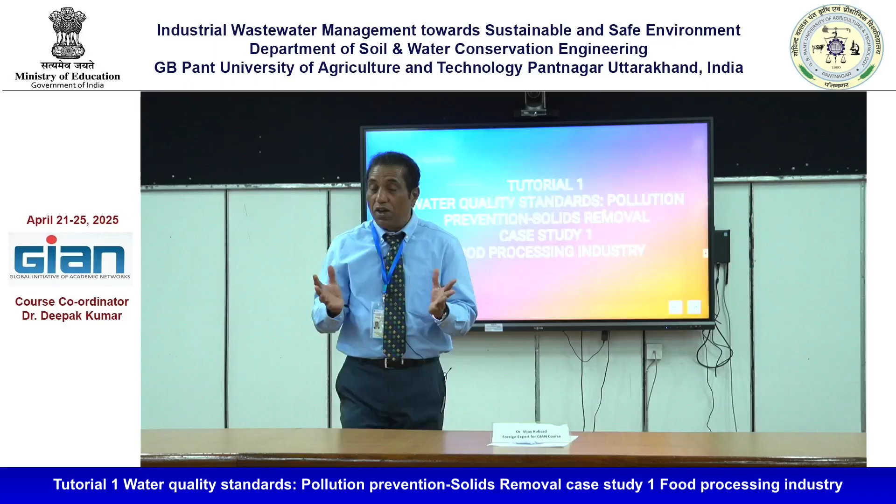You may achieve some part and the next person will carry on. That is how this environment is - if you see how big it is, it's not one person. That is why I was trying to tell you what are the different stakeholders in this industry. You see the industry people, you see the government, you see the activists, you also see the public participation. You have to work with different expertise.

You have to also borrow some of the expertise from other countries. So all have to work together to make it successful, because the place where you are living right now, we have a limited space and source. Also all the resources are limited. You know, the degradation - every day we find a new product, a new contaminant generated, right? So at the same time, we have the capability to generate contaminants, but we should also find the solution of how to take care of that.

There are certain things which we cannot live without. But that is okay - at the same time we should make sure that we keep our environment, water, air, and soil in perfect condition. At least we should start working towards that. So that is what this course is about.

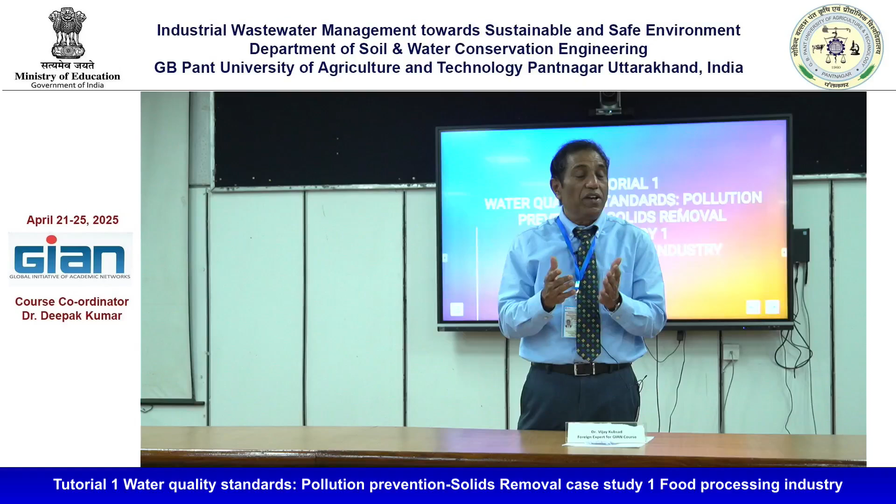Industries, if you help them, work with them, many industries step forward. They also want a solution, but they are so busy, sometimes that may not be intentional. If anybody wants to, one can step forward. I have done cases, success stories like that.

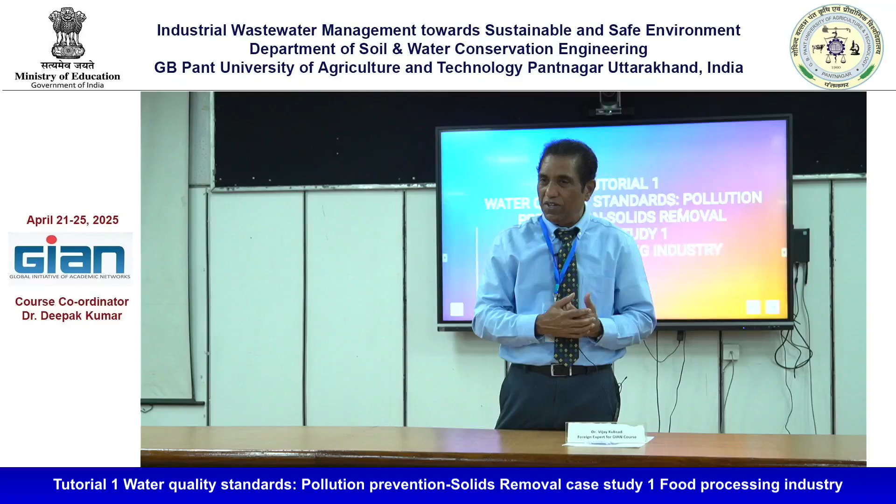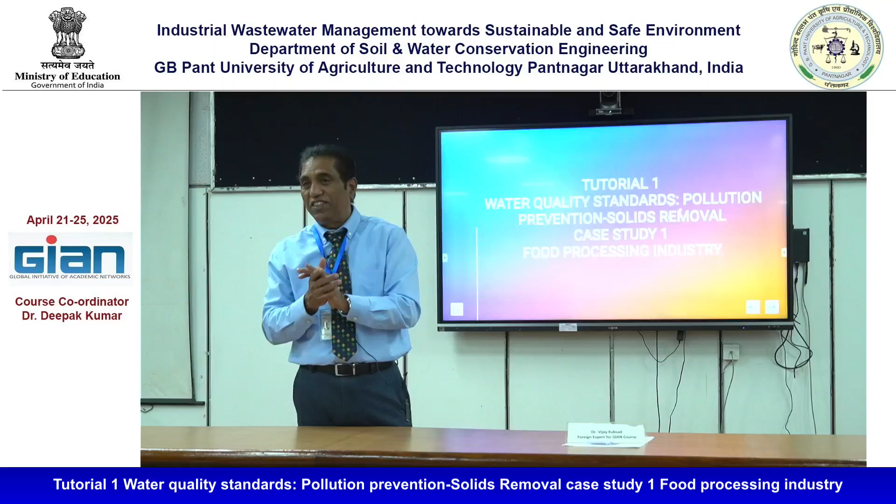If they are willing to work, you can step one step forward to help them, give them some time, give them all the help they want, assistance from your side. Then it becomes successful. Then how you feel once the system is not there, and today you have developed the system. This is just unparalleled to anything. If that is the pride you are taking, if you step forward, you can make a change in the system. So that is what this case study is about.

So in this, there is a food processing industry in a particular place in our eastern region. I have given some highlights, what it is, to understand. It is a food industry. It operates for food processing. They do all kinds of vegetables, clean it, and make it contaminant free, then pack and sell it to other countries all over the United States.

So in the food industry, what happens? Large quantity of foodstuffs comes in. Then there is a system, the process plants which cleans that. Then there is solid generation, lot of solids is generated. In addition to that, what happens? BOD concentration. So one particular industry was facing issues with the solids, because you have to remove the solids and then discharge. Otherwise, what happens? It will create a problem to the receiving side.

There are two components in the receiving side. Cities, what they do is they build a wastewater treatment plant which basically treats domestic wastewater, correct? Then you have a certain industry, some part of the industry, few industry, it depends, you cannot put all the industrial wastewater into the domestic. Certain percent, it has a capability. You can mix certain industrial process water into that domestic wastewater, and that is taken care by the city, correct?

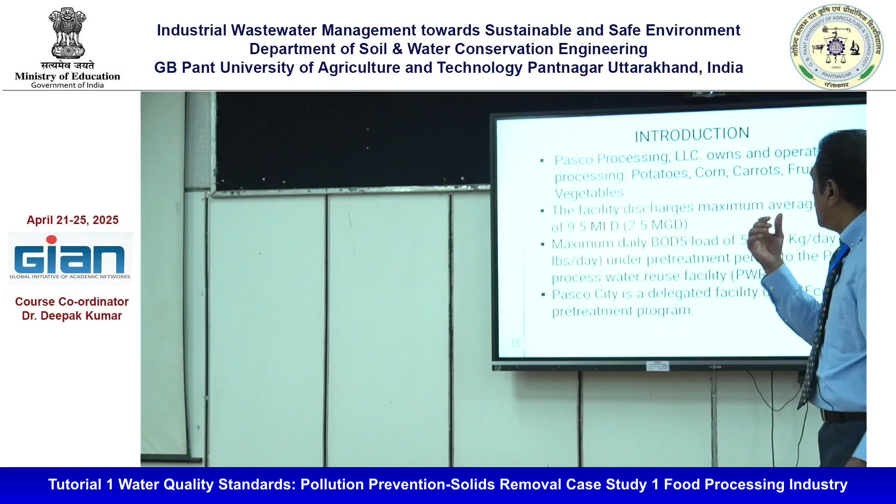So this particular industry, the facility discharges maximum monthly flow of 9.5 MLD. I have converted that. It is 2.5 MGD. So this volume of wastewater is discharged every day. See, imagine the type of the plant.

That is the usual tendency there. They always have a very big plant, whatever they do. So that is easy to manage. That is just a system. That is why most of their stuff is mechanized, right? So 9.5 million liters per day, and maximum daily BOD load is this much, 57,727 kg. That will give you just an understanding of the quantum of wastewater, the quality of wastewater, right?

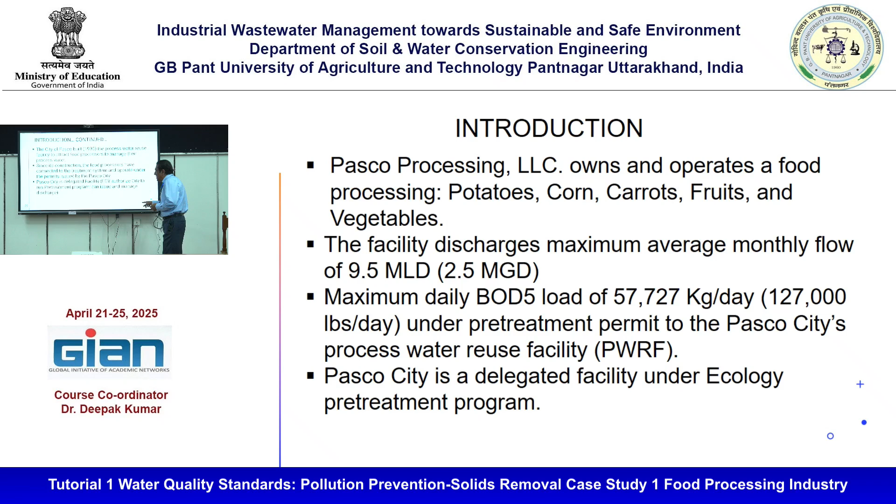So that was discharged. Process water reuse facility, that is, they were discharging it to the city, they were having issues with the treatment. It was a delegated facility, of course. I mentioned we authorize the city to take care of the wastewater which is coming into their treatment plants.

So this is a little bit about history, when it was started, because what happens when they started earlier, treatment plants are not built accurately, right? Industry goes on expanding. It is a problem everywhere. But unless somebody gives proper attention, they will not upgrade. So that is why they wanted to expand and make sure that they will take care of the wastewater receiving.

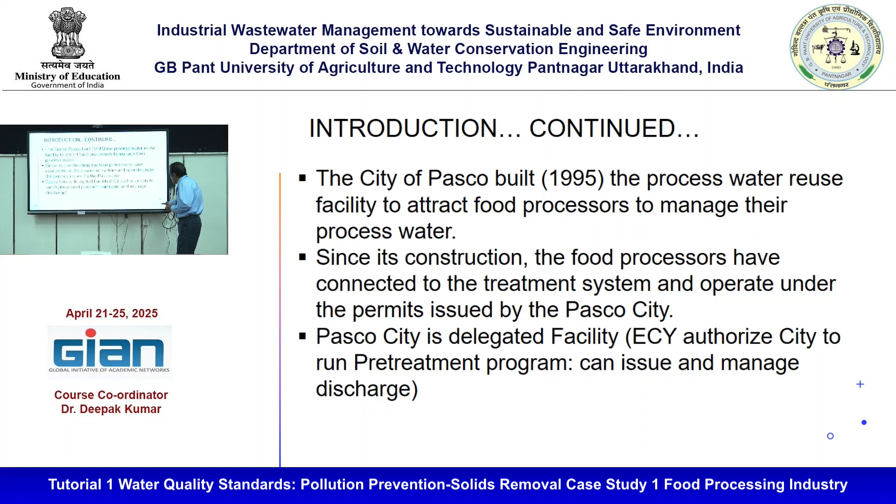Okay, so if you see the system, what happens? They have a system. You can see from the left side, the big trucks will come, unload there, then it goes to the storage, clean up area, and this is the storage and cooking, pressing. That is the sources of wastewater coming from different processes, right? This is all the wastewater collected from different processes. Then the dried product is taken out.

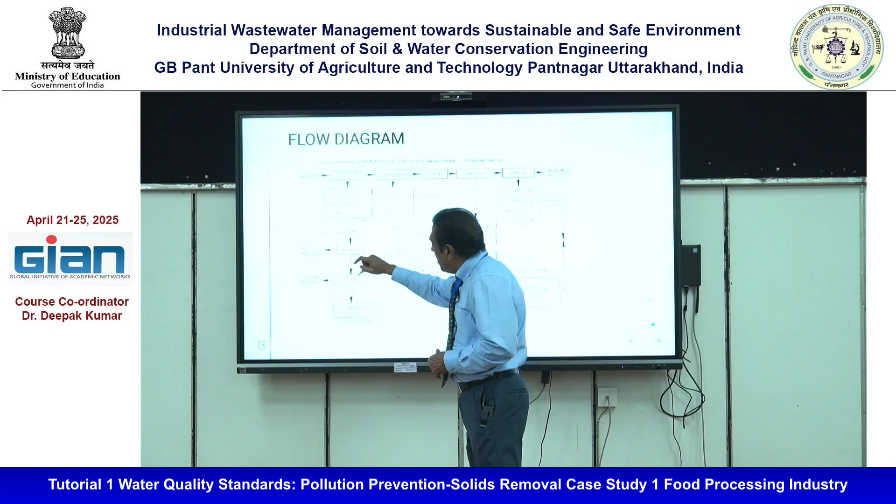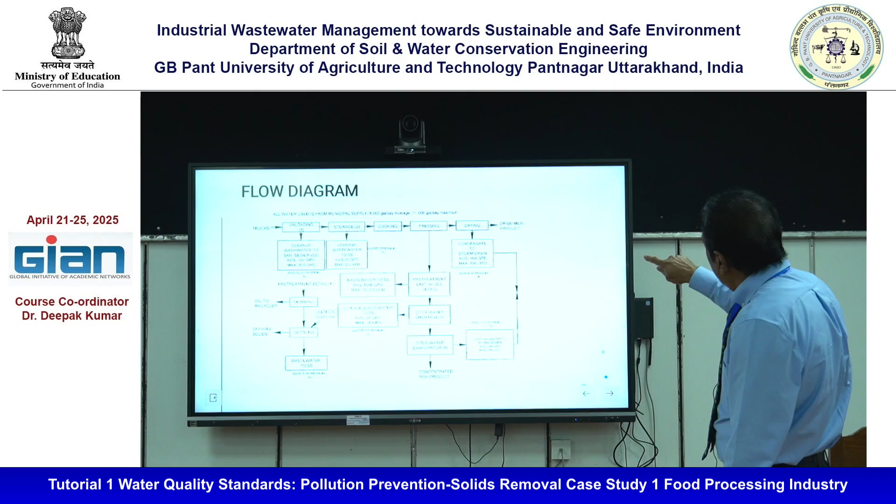When industry discharges to the receiving wastewater treatment plant, they have to pre-treat. That is why you see oil and grease is removed by skimming. Yesterday you saw a bit of that, at one corner there was a skimming. It has to be removed before discharge. Then settling, because there are solids. When you clean that, there's a large volume of solids settling out, and the suspended solids in the wastewater stream are reduced. Then this wastewater comes to this pre-treatment unit, and the different processes take place there.

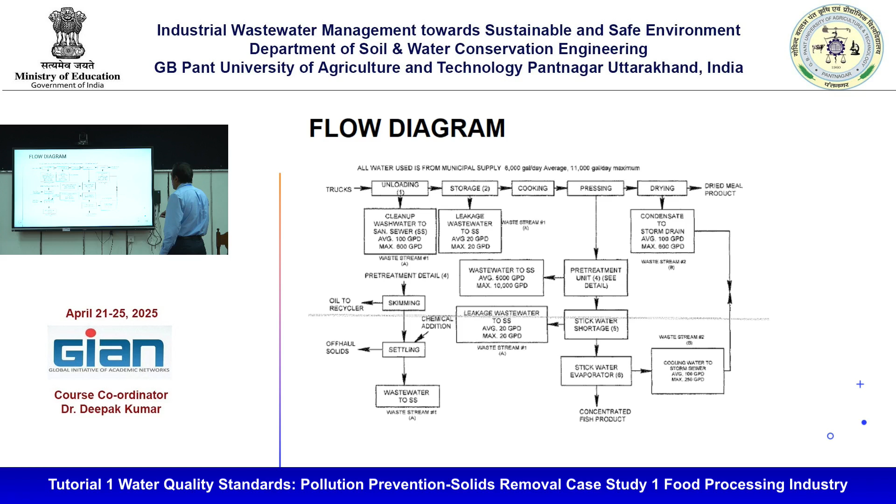Then the clean water goes to the treatment plant. Let me show you here so you understand. This is the process water reclamation facility flow: solid removal facility, and winter storage with a double liner pond. The treatment system here is slightly different because of the climatic conditions.

In the winter, they have to store the wastewater coming out of the system, because you cannot just discharge it as it comes - you need a regular flow. The receiving treatment plant always specifies how much wastewater it can accommodate, with limitations on flow and on the different parameters discharged. So they build a huge pond where the wastewater is first discharged. That acts as a buffer, and then they can regulate the flow.

In the meanwhile, that pond also acts as a settling tank. While you are collecting the wastewater, you give it a little treatment - if pH is high you adjust it, if pH is normal no need. When discharging to the treatment plant, you must make sure you are not doubling the cost of treatment. It is not necessary to treat here and also treat there - you have to give that privilege to the industries too. You just cannot put everything on the receiving plant. If the receiving side is capable of treating, why treat it here? Treat at one place only, if it's not causing harm. That is your determination, how you decide.

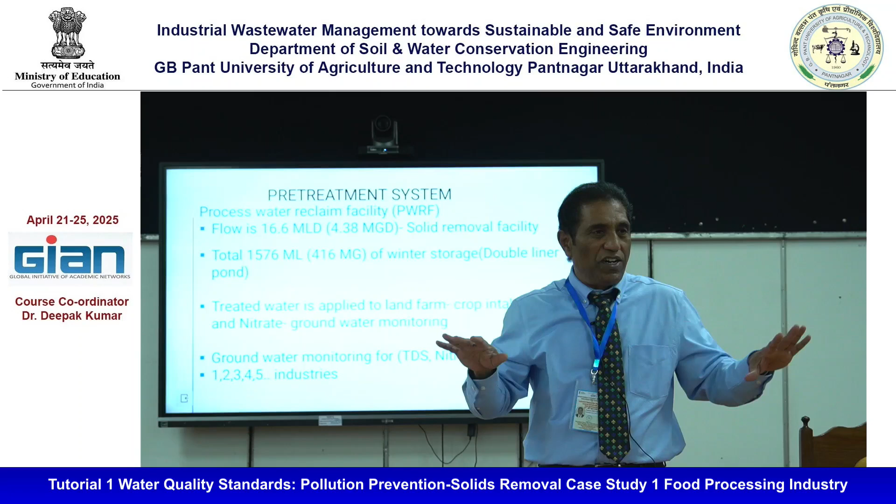So if it's a double liner, they can avoid that groundwater monitoring system - you have a second layer of protection. If there is any leakage in between, there is a system that shows there is a leakage - the level goes up, connected to a monitoring system. So the level rises, then they understand there is a leakage, and there's a way to fix it. So with a double liner protection, you don't need groundwater monitoring. That is why the treated wastewater is put into a double liner system.

Then the treated wastewater - how is it treated? All suspended solids are removed, so it's not that contaminated. For BOD, biochemical oxygen demand - the 5-day BOD we measure - if that BOD is about 300, 400, or maybe 800, the receiving wastewater treatment plant can handle it. Because domestic wastewater treatment plants are usually built for domestic wastewater where BOD5 is around 300. You have to give a little privilege to these industries - if it's 500, 600, 700 in case of food processing industries, they can discharge it because when mixed with domestic wastewater, the treatment plant can manage it. So that's how it is helpful.

It is helpful to the city also. These industries take care of their treatment and pay a lot of money to them. This is how the funding to the system works. That is why it always works for the cities and industries together. They get a lot of funding.

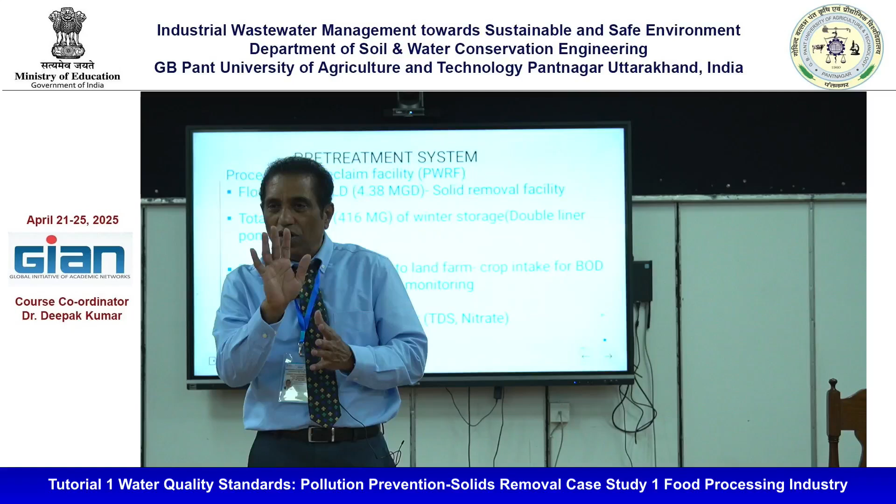So there will be an agreement: even when they are discharging, this is the volume of wastewater we are taking. Then what is our job there? Regulator. If the city is delegated, the city will issue the authorization for them, then the city will monitor them. How much volume are they sending? How are they taking care of solids? Are there any violations in the BOD? Is there any leakage? There is a leak detection test, which they will have to submit a report on, showing it is not entering the groundwater.

So that is how it is a win-win situation. Why I am giving this example is, the industry and the city treatment plant work together - see how the financing is done. If we work in two different directions, nothing will happen. They take care of themselves, and the city will run partially here and there. People won't pay tax, they won't have the resource. So this is kind of an industry and city collaboration.

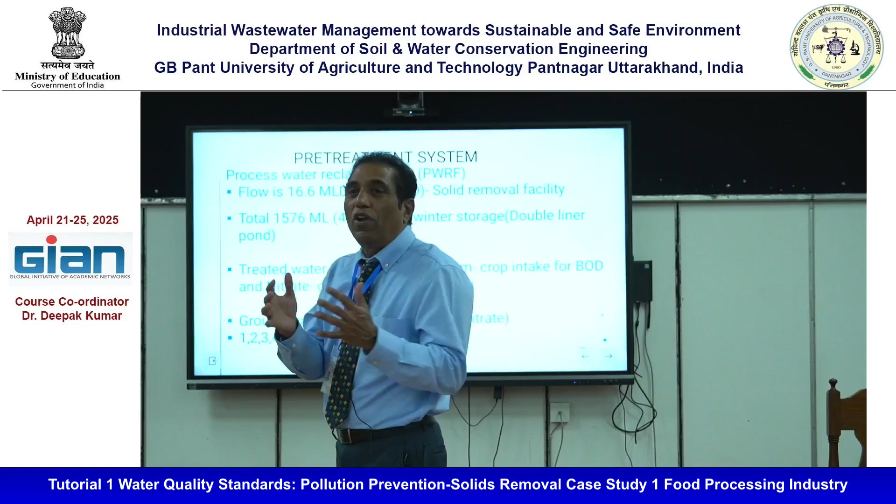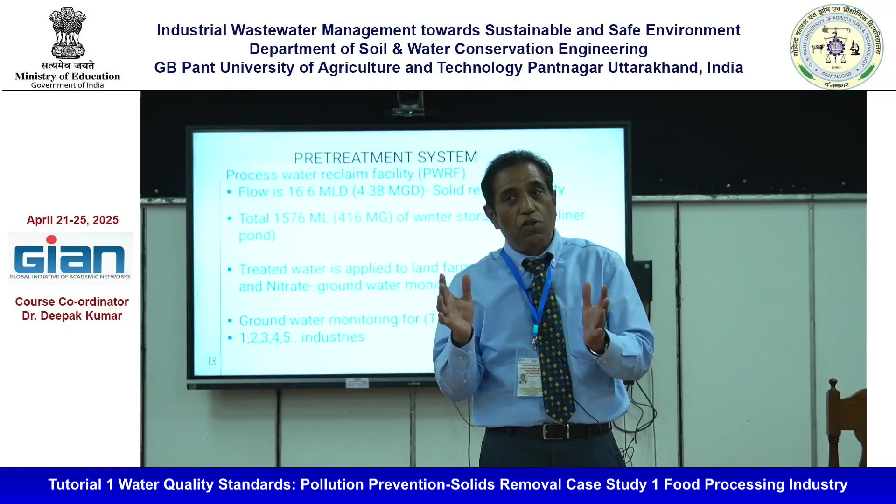Instead of building one plant, you build a big plant. If it is a 5 MLD, you build 10 MLD. Big plants are easy to manage, you can have a lot of resources, you can also help industries, you will have good collaboration, and you can use the latest technology. This is how the system works. So this system has to come into existence - that is the very purpose of this. That is why I am giving this example of how it becomes successful.

So when we say groundwater monitoring, what we observe, the major contaminant is the TDS, total dissolved solids. Dissolved solid is a very important component. That is why the characteristic of wastewater and groundwater changes. We have different groundwater regulations also. Once the discharge is on the land, then groundwater monitoring comes into picture. You have to be more careful.

When you are discharging it to the river fisheries, there are people working on the fishery sites, so there are a lot of strict regulations also there. It is not only the Department of Environment - the fishery people will also come into picture, checking whether you are really taking care of the wastewater, because fishery standards are much higher. So that is how the collaboration works. The money is generated and the system works, and you are also helping the industry, and making sure they are not doing anything wrong. It is a win-win situation, and the government also monitors that.

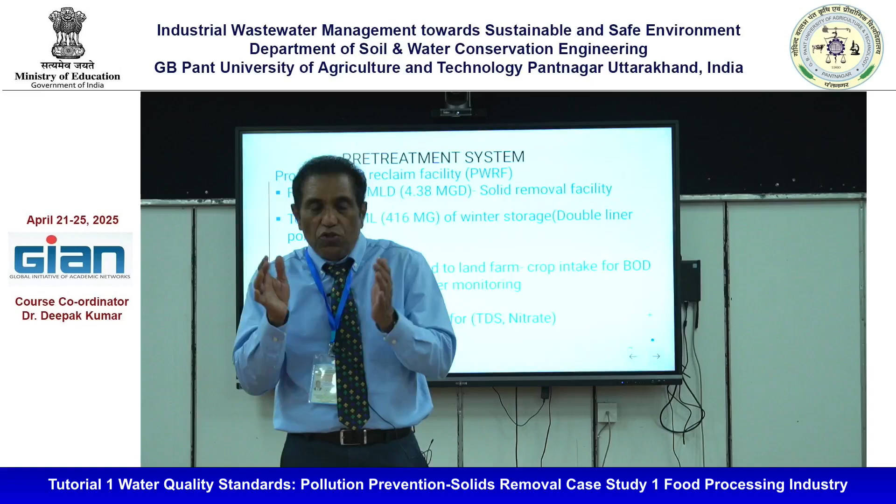That means we monitor them, we also observe, we take the report, we see the sampling. They have to send a report every month, and daily observation - see how tight it is. There is no chance of any movement here and there. Every day they will have measurements, weekly parameter measurements, monthly or quarterly monitoring of some contaminants if observed, and yearly they have to submit a report. See, where is the chance there? So the chances reduce, and the system becomes more efficient. That is how it has to be managed.

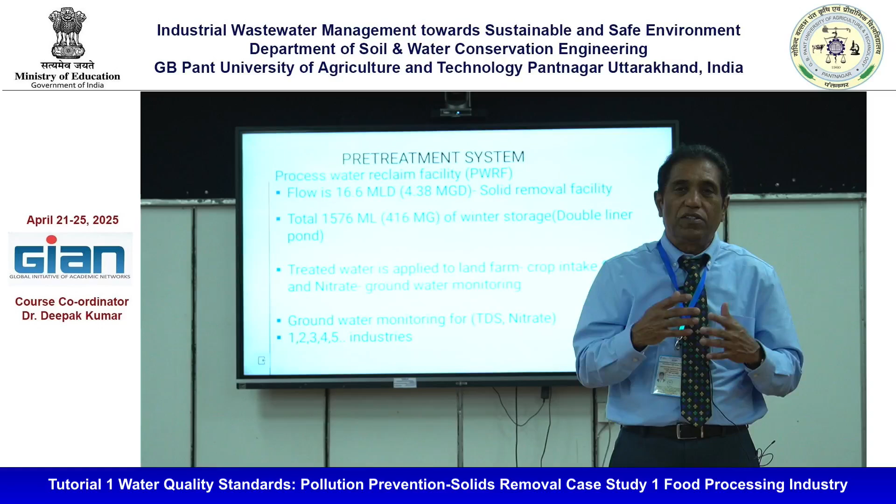If we say some industry is discharging with no regulation, how long is that going to go on? That is what I wanted to show - there is a system which can be worked out. So there should be some guidelines, regulations. That is what all people have to work together on. That is the intent of this case study.

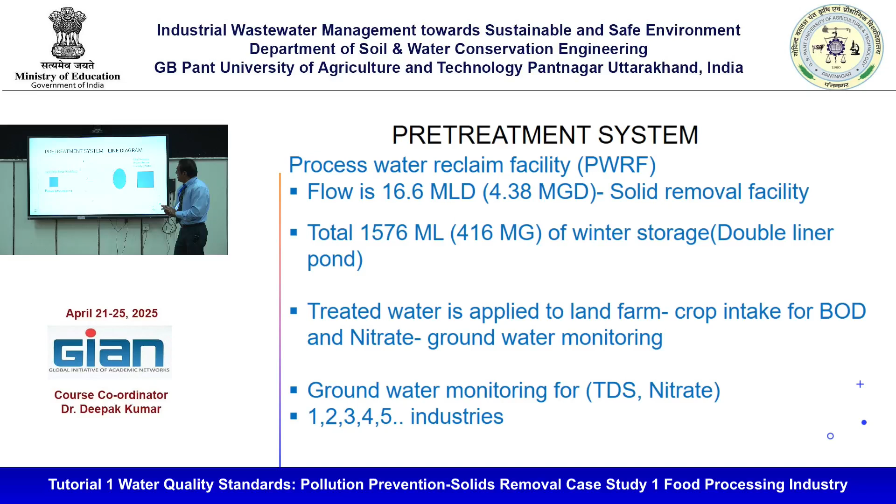If you see here, what is this pre-treatment system? I have put some line diagram. So this is the city - they have a treatment plant. There are many industries, 5-6 industries. What will they say? Okay, we will fund the city treatment plant, and they also take care of their residential wastewater - they can all discharge there. They can build a big treatment plant and take care of it. Both are happy. Government is also happy because they are doing it, and if there is any issue, then we interfere there.

The city is capable of doing that, then we delegate. If they have to step forward with funding, there's a large team which works on that—it's not a one-person job. They have an equally big team that can do all the sampling, measurements, reporting, enforcement, and lab analysis. If the city is not delegated, then we do it directly. And if we delegate them, we still monitor. I oversee the reasons, and I also help other areas understand how this delegation should be done.

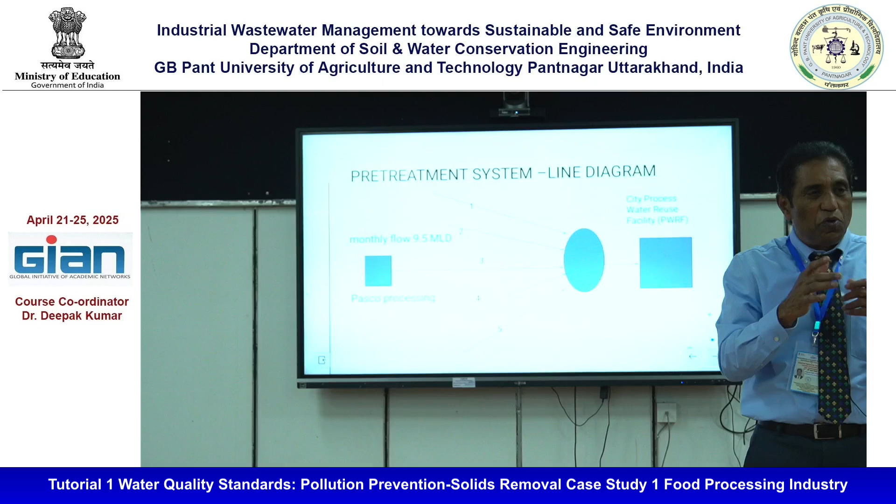When different industries discharge, you build an equalization tank first, because some may discharge seasonally—just 6 months a year—while others discharge continuously, or a few days on and a few days off in a month. So it's not consistent. To have a consistent flow, you can't let the treatment plant receive a large sum of wastewater in season and nothing on other days. Your treatment plant has two important components: hydraulic loading and organic loading. You should balance both before you discharge.

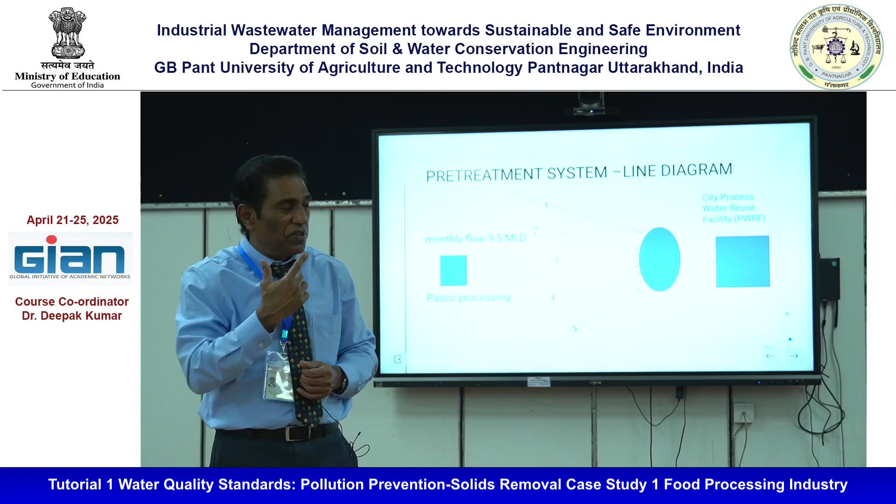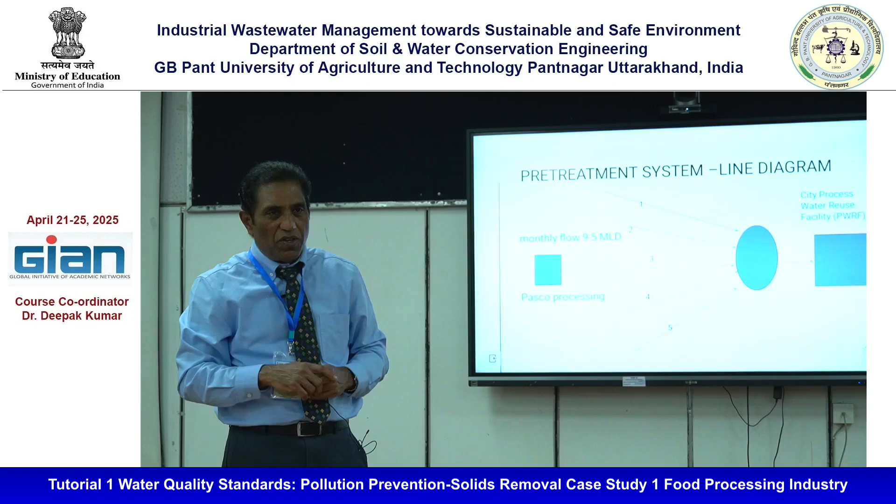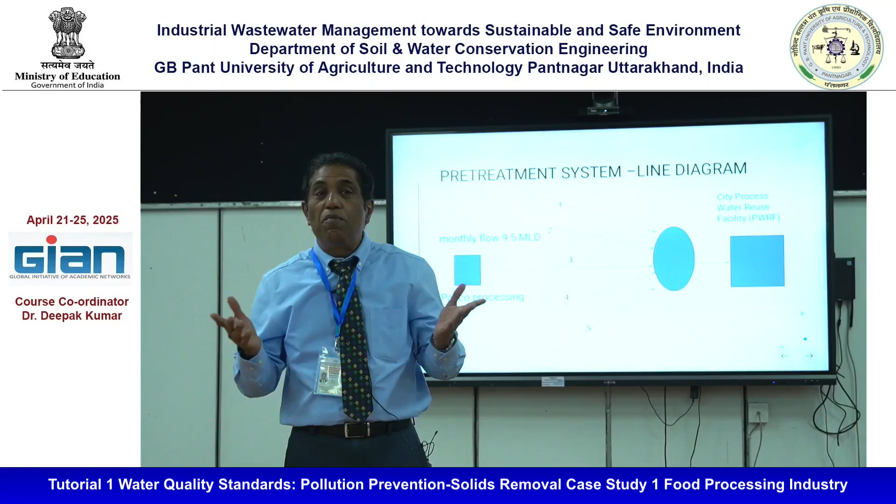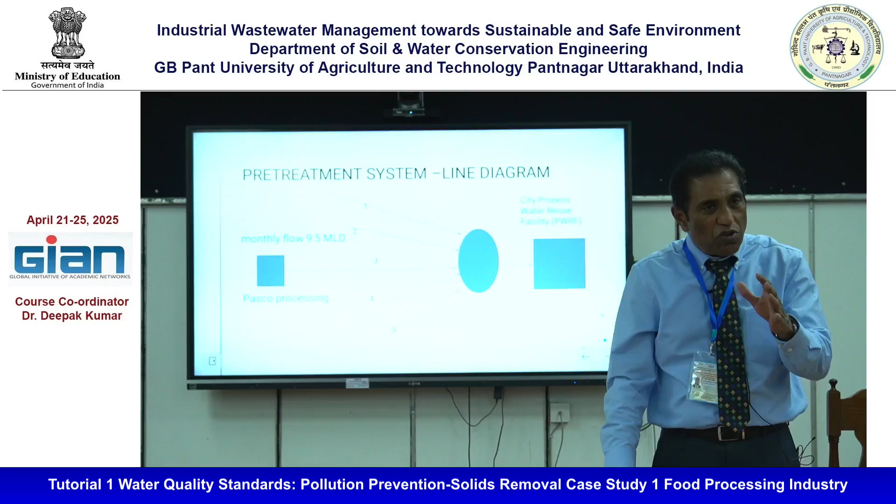The receiving wastewater treatment plant is managed online—you can see how the wastewater is coming in, what the sampling points are, and what analysis is done. Daily monitoring of all this is a big job. All analysis data has to be done by an accredited lab, and once accredited, they have a responsibility—they can't just do anything. They are monitored, and we decide where and when measurements have to be taken. This is all given in the authorization, which we call a permit, and these conditions are mentioned there for the measurements.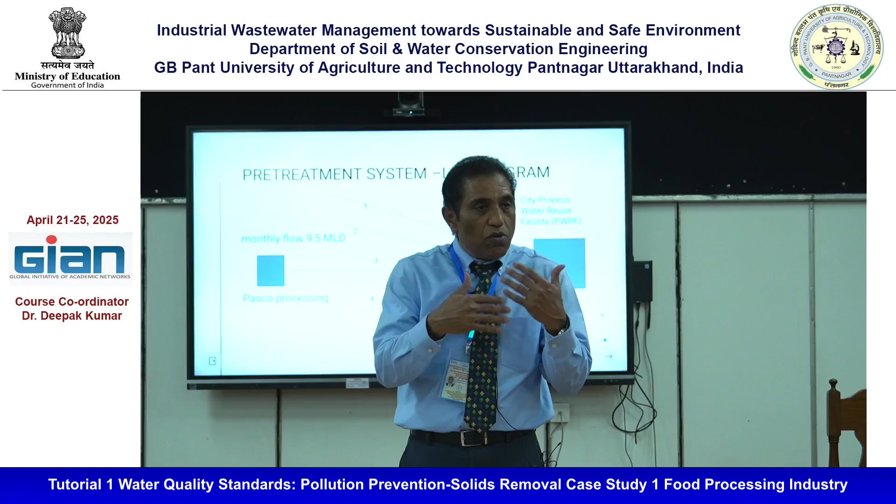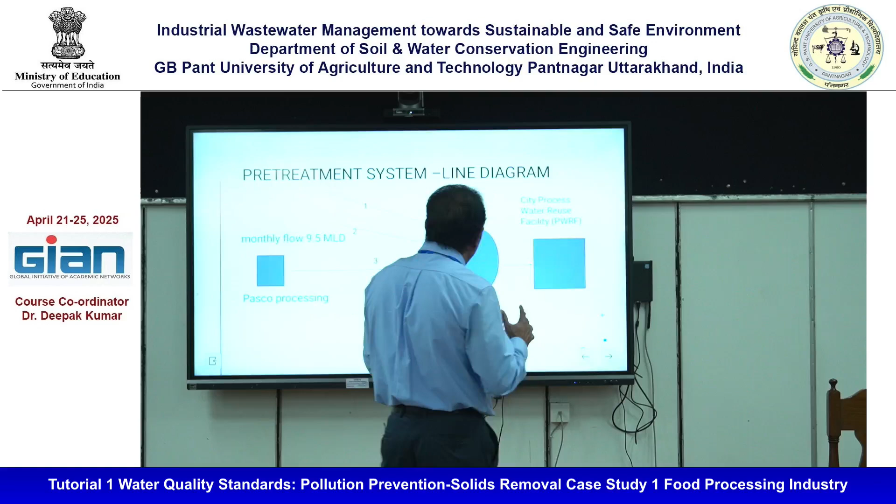In case the plant is like a storage dam, if it's too big, then dam regulations also apply. If an embankment collapses, what measurements and actions do you have, what is the spill plan for your plant, where does your sludge go—everything should be documented and open. With an authorization, the regulator can go monitor and ask for any required information, and no one can deny it. That is how a win-win situation is created here.

Looking at the problems and actions I've seen over the years: plants expand and there's excess buildup of solids. The primary source of solids in the effluent was due to inadequate volume of the mud bays. If your treatment is inadequate, there's a problem. This particular industry—one example among many—was having a problem with solids.

This industry had a problem with solids because their treatment system was small—the settling chamber was small. When it's small, there's less detention time, and when detention time is insufficient, suspended particles won't settle; they'll just flow through and cause problems. That's why sufficient detention time is important, and why engineering evaluation is done—to determine what the size and depth should be.

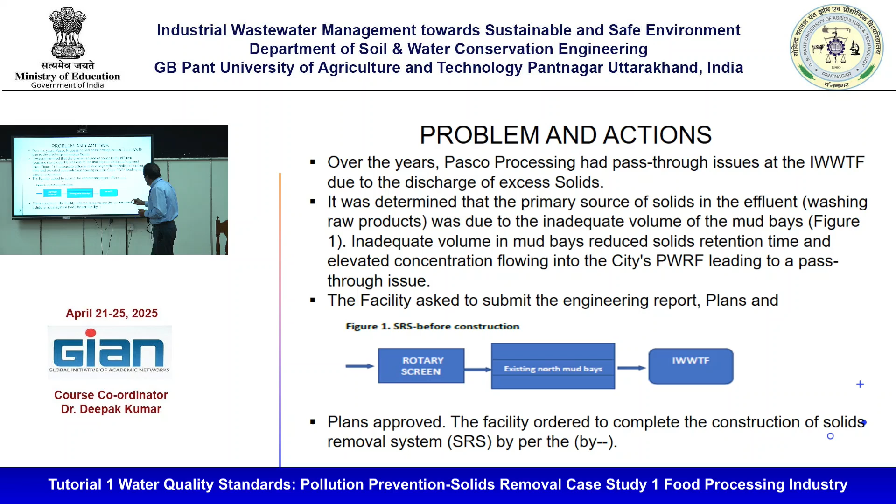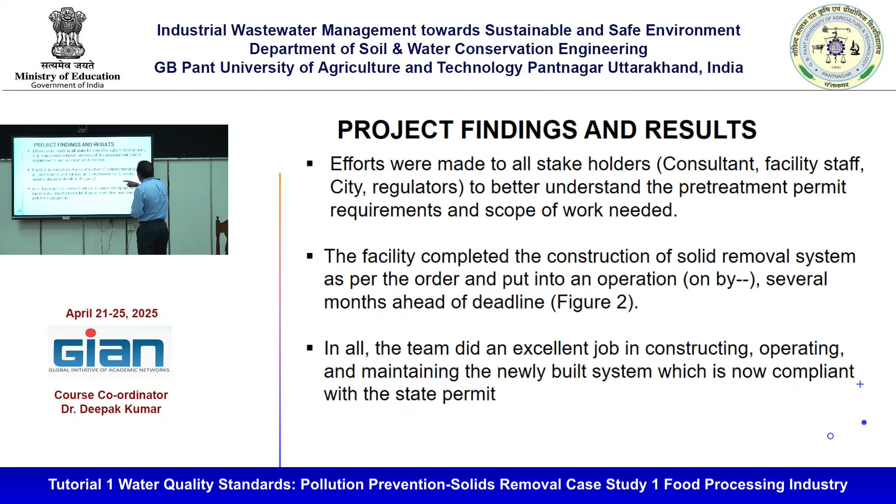So this was the problem, and then they took this one. After the engineering evaluation, efforts were made to bring all the stakeholders to one place. What is the problem? You have to bring the receiving end and the discharging end, the people around there, and the regulator all together and find out the solution. Then consultants will also be there.

So this is how the solid removal system is built, and the issue with solid removal is solved. What is the outcome? They built new treatment plants. The old treatment plant, they refurbished. They built a new treatment plant. Then they added...

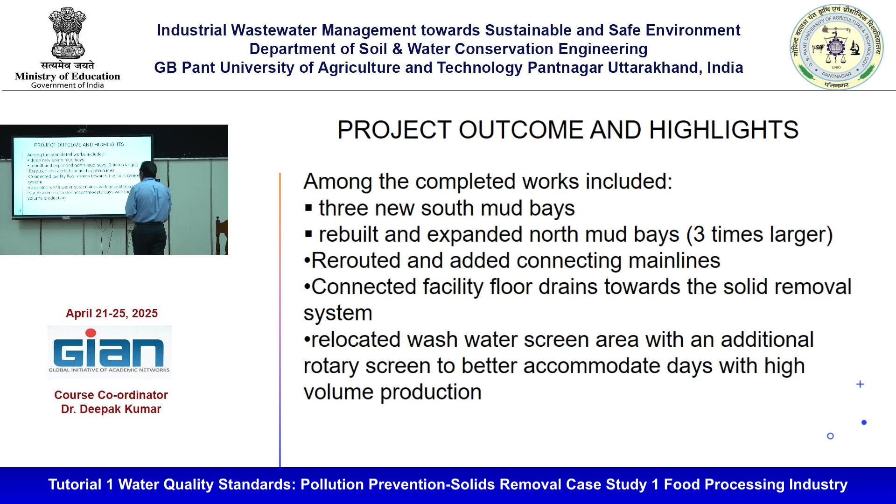...the aerators also to reduce the BOD, that is the DAF system, dissolved air flotation. You have seen air flotation there, right? Rotaries were there in the wastewater treatment plant. Here also they put a DAF system. Once you put the DAF system, the oxygen content is increased and the BOD is reduced. That is how you will learn more about this in the biological system, right?

So in this, the DAF system will reduce the BOD. I will show you the picture of that. So that is how the BOD and suspended solids issues are solved, right?

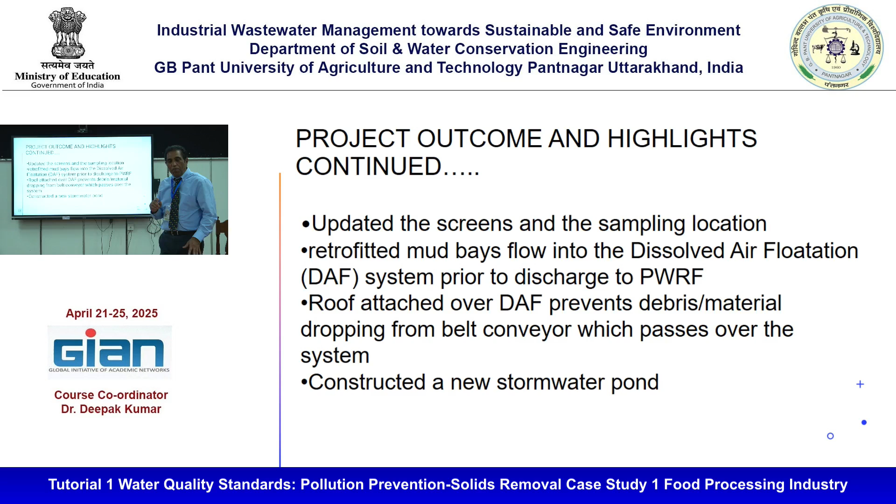Then another important thing: there was a big pond there. You collect the water from the process plant, then if your system is not sufficient, that water will go somewhere. There was a stormwater pond, and this wastewater was entering it. You have seen some example in the morning. If your sewer system just breaks like that, it will enter everywhere. It may even enter a lake in the surrounding area.

So that is how it happens. They made sure that no leakage from this industry goes to the pond, so the pond is protected, correct? So what were the problems? The solid problem is solved because they built new settling tanks with proper detention, and the engineering design was done on that. Then they also put a DAF system into place to reduce the BOD, and made sure this wastewater is not entering the big pond nearby.

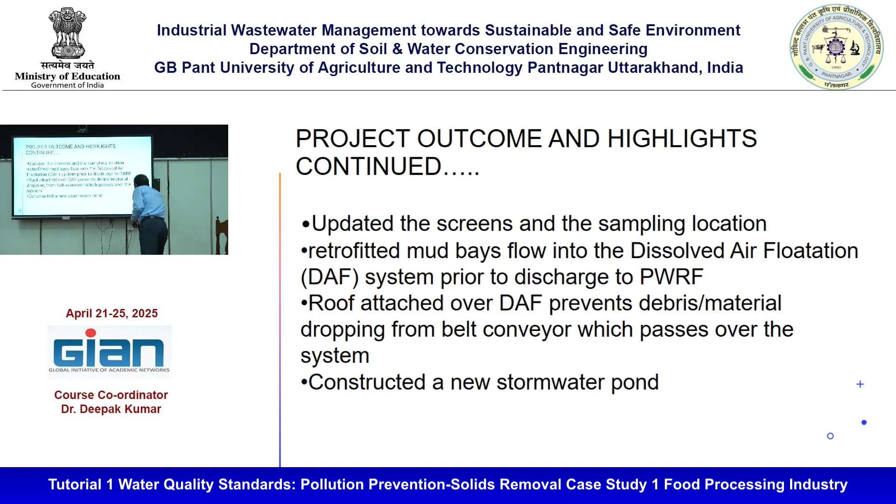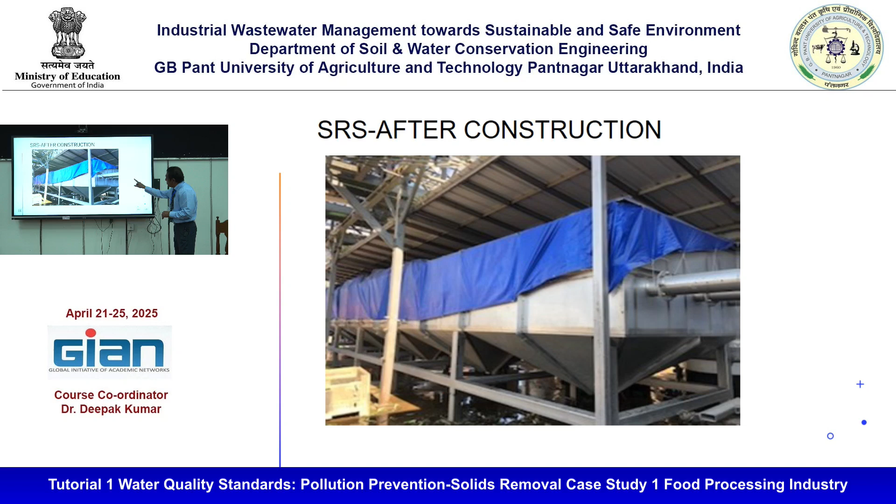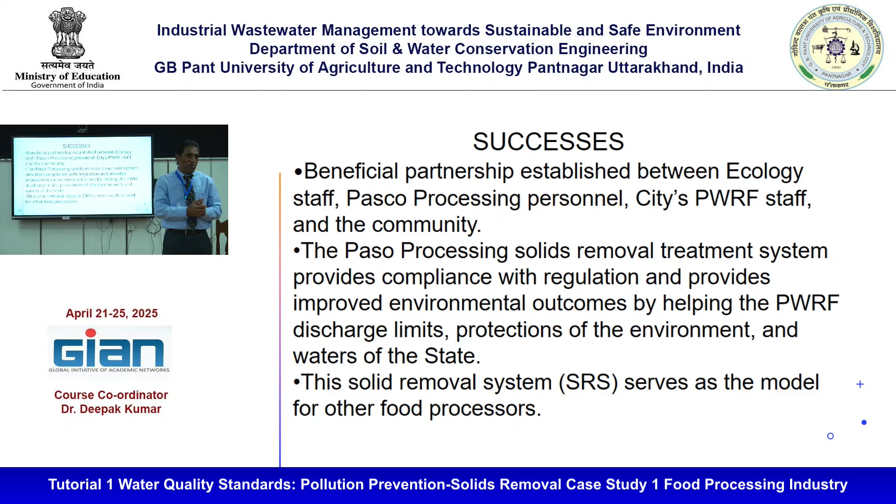All the important issues related to the industry, working together, these issues are solved. So this is how this system is done, right? This is about the first case study. If you have any questions on this, go ahead, right?

Any question? You can also share if there is any other specific issue you have worked on, where there was a problem and it was solved, right? You can also share. There is no...

So this is how the system works. If there is an issue, how will you solve it? You have to solve it step by step. Bring all the stakeholders together, understand the issue around them, give them time, and they will also step forward. Otherwise what happens: if you put a fine on an industry producing a large quantity of wastewater, it's of no use, right?

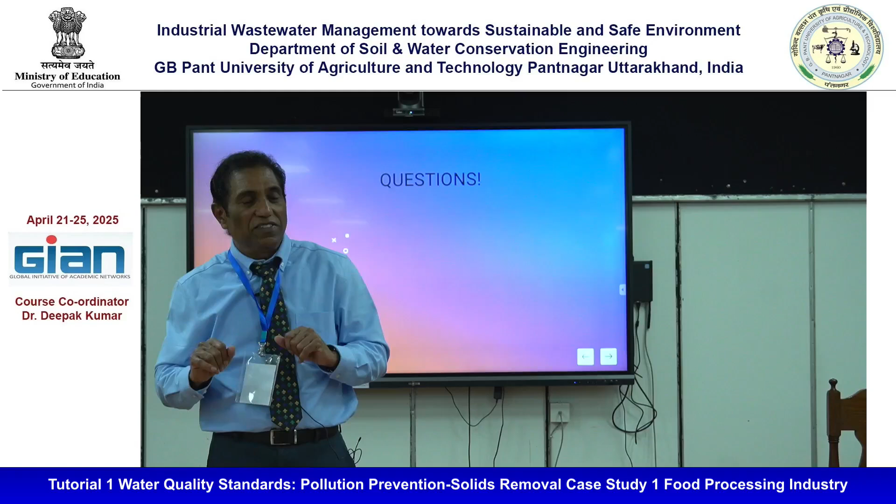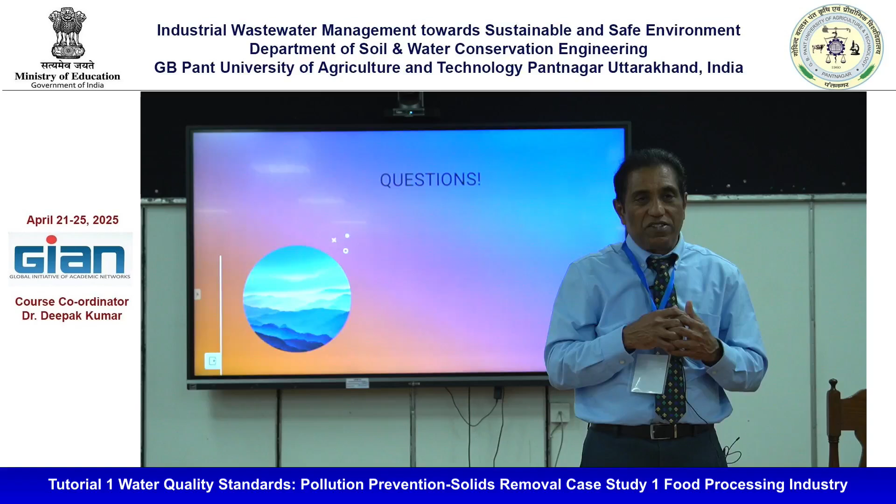I have worked in an industry where per day production was $2 million. If you put a $10,000 fine, it's nothing for them, right? So that is not your main aim. The main aim is to solve the issue forever. See, this problem is solved completely, this problem is solved forever, right? This is how there is an industry-institute partnership, right? So this is how the system works.

Okay, if you do not have any questions on this, that is fine. Thank you on this.